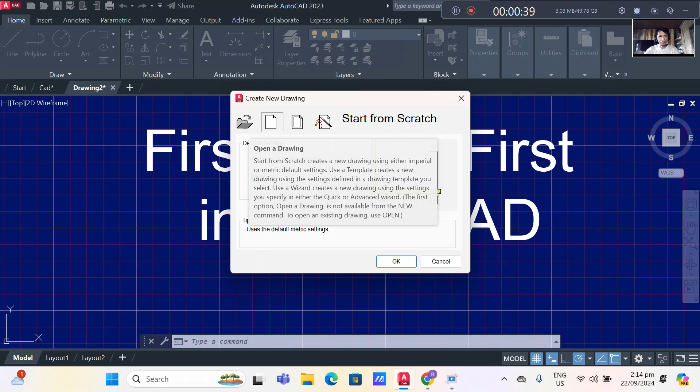In here, you can open a file, start a new drawing from scratch, or use a template. When you start a new drawing, it will suggest you to start it with metric or start it with imperial, English system.

The other startup is the template. You type 2 and then go back to new file, and this second startup is the template startup. In here, you can use any kind of template suited for your project.

But if you are in here in this startup template and you don't want to use any one of these, you can go to this inverted triangle tick here and open. You can choose from here, open with no template imperial or open with no template metric.

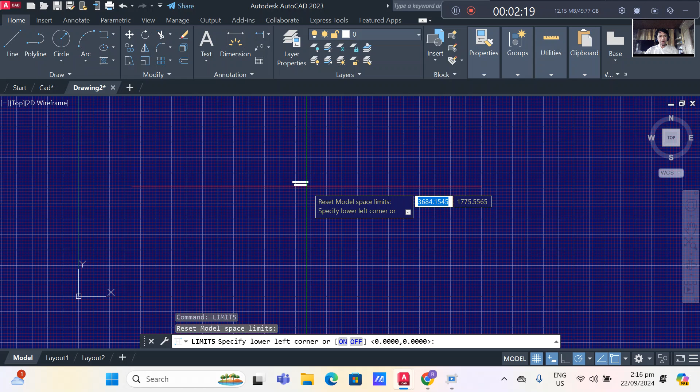The next one is, when you are now in AutoCAD, the first thing to do is you set the limits. Type limits here, then enter. The limit that I'm trying to say is the boundary of your drawing area, so that your drawing will not be lost.

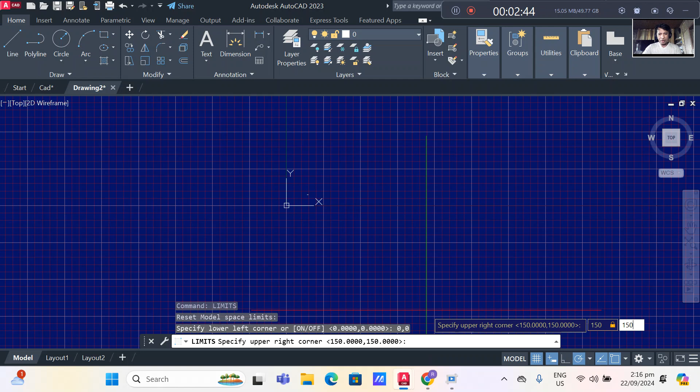On the lower left corner, type 0,0, then enter. And then in the upper right corner, type 150,150, then enter. And then type Z for zoom, enter, then E for extents. Automatically, the lost drawing will be shown.

Next is, you are going to set also the units. Type units, then enter. In this unit, it will help you what kind of units you are using when you draw.

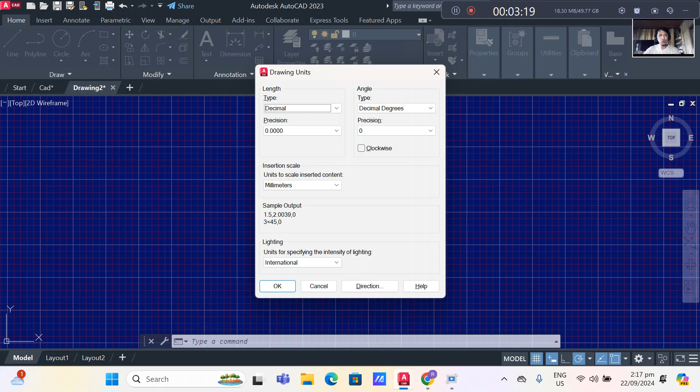When you draw your plans using metric, you use decimal. But if you plan to draw your plans with the English system, use architectural. For me, I always use decimal. Next, the precision. In the precision, choose 0.00.

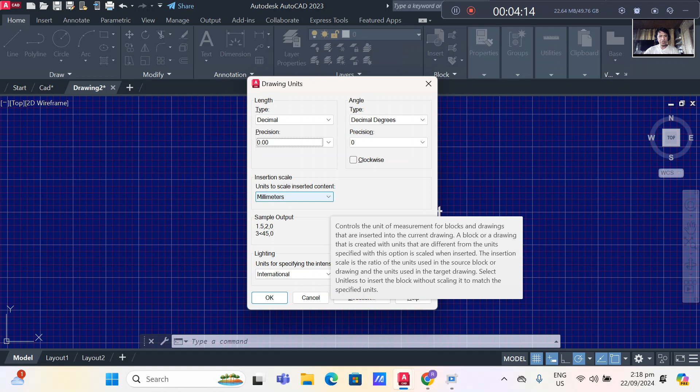And in the insertion scale, it will ask you what unit you will use when you insert blocks, insert from ADC of the different blocks that are embedded in there. So for me, I will just use millimeters and then click OK.

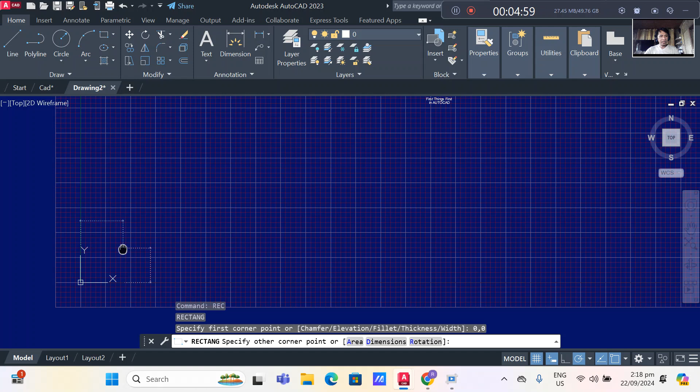Next is your first time of drawing. For example, if you want to draw a rectangle and you want your rectangle to be drawn at 0,0 x and y, you just type rectangle here, rec, then type 0,0. Automatically, your rectangle will start from 0,0.

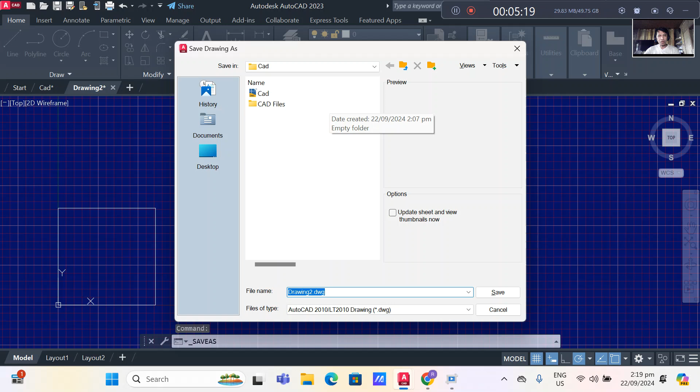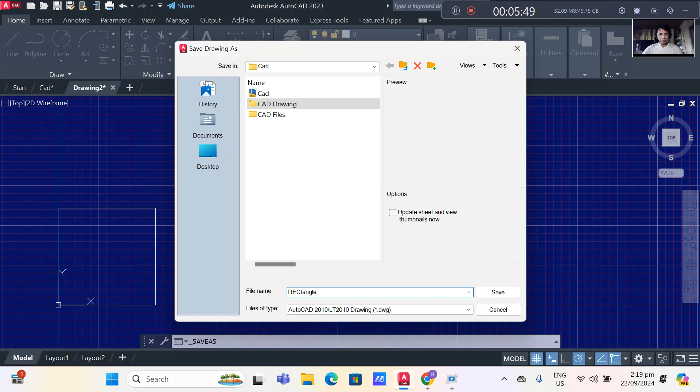After drawing your file and you want to save your file, you go to the application menu. Then you click save as, and then from here go to create new folder, and then type the name of your folder. And then you also type the name of the file. And then save. Automatically, your file is saved in the newly created folder.